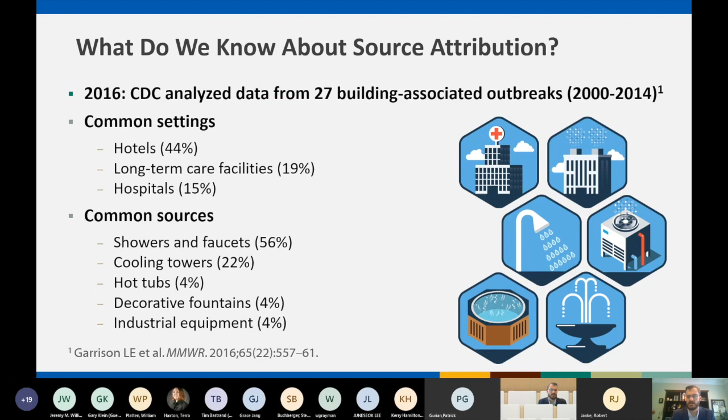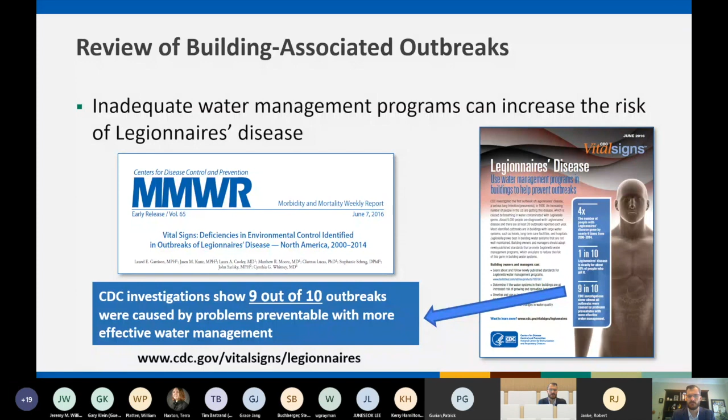So looking a little deeper into that analysis, in the form of an MMWR which you see here on the screen, the big take-home point from that analysis was 9 out of 10 outbreaks were caused by problems preventable with more effective water management. What we're seeing oftentimes is simple associated failures during these outbreaks.

As we break them down, or look at the root cause of these outbreaks - the environmental deficiency or failure - we break them into process failures, like for example a management plan did not exist or an inadequate one was in place; human error, where a person did not perform something they were supposed to do, such as checking a thermostat on a water heater; equipment repair, so equipment malfunctions; or unmanaged external change, which could be something like an unmitigated water main break that resulted in brown water entering the building.

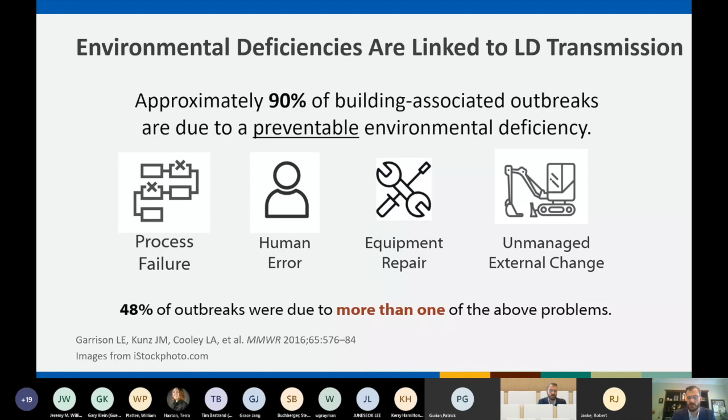48% of these outbreaks were due to more than one of the above failures.

Okay, so now we're transitioning into actual water management programs. So we quickly built the case for water management programs, and that they can be helpful and reduce those common root causes that we see during outbreak investigations.

So not all buildings require a water management program. Buildings that are recommended, of course, are healthcare facilities. Does your building primarily house people 65 years or older, like a retirement home or an assisted living facility? And this is a big one: does your building have a centralized hot water system, like a hotel or high rise? We know those water systems are more complicated, much more pipe, much higher likelihood or density of biofilm.

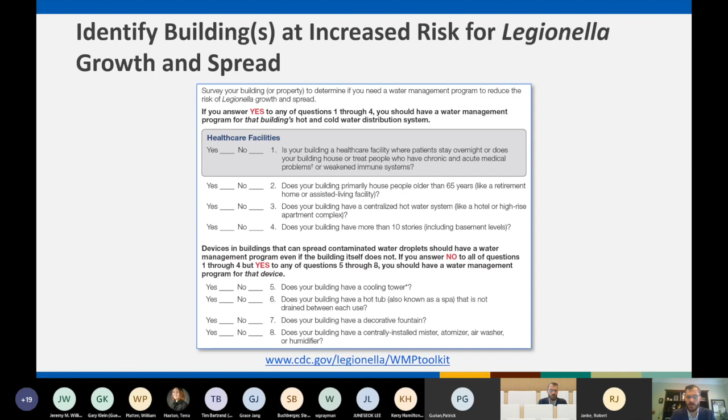Does your building have more than 10 stories? We get questions about that a lot, but the reality is oftentimes these 10-story buildings have these centralized water systems. Or does your building have a device such as a cooling tower, a spa, or even a decorative fountain, or a centrally installed mister, such as those grocery store misters in the produce section? Those devices are recommended to have a water management program.

You may have heard of the CDC Water Management Program Toolkit, or the CDC Legionella Toolkit, there's a picture of it on your screen. That toolkit is actually a plain language version. We translate the bedrock standard of water management, which is ASHRAE 188, into plain language to make it easier to digest for public health professionals, building managers, healthcare facilities, engineers, anybody responsible for implementing water management programs. It's a step-by-step program which goes through all the aspects of water management and provides helpful examples, including a healthcare specific section. That's freely available online right there at the link.

We also understand that water management can be complex, especially in these large buildings, and oftentimes building owners and managers just need to know where to start. So we developed this training along with partners called Prevent LD, and it's a free training available at the link you see below. It takes that CDC toolkit and ASHRAE 188 and puts it into a couple-hour training program, and it is free and available online. I would like to point out some of the templates, and you can see just a brief screenshot of the template on the screen there.

These are actually tools and templates that could form a water management program. It concludes with 2 case studies, one of them in a non-traditional setting, an industrial setting, and the other one is in a long-term care facility. So I'd encourage you to take that if you want to learn more.

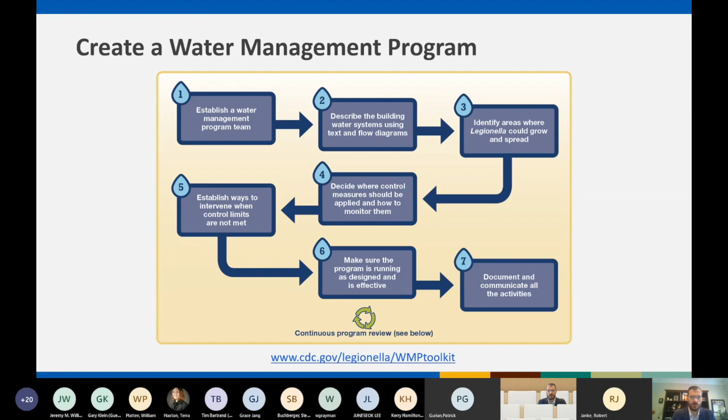So we'll go into detail on a few of them here. The most important is having a well-rounded water management team. That team may change based upon the facility size, complexity, and type, such as healthcare. So we'll go through a healthcare example.

We're going to need to have the ability to oversee the program, somebody in charge, somebody that can authorize expenditures or authorize things to be done, based on the water management program performance. We, of course, need knowledge of the water systems, and that's where facilities engineering and maintenance come into play. That also could be the role of a consultant on the water management program team. And consultants play a critical role, where needed.

However, a consultant should not be leading a water management program team. Those daily responsibilities should be given to staff on site. And of course, we need people that can implement that water management program and then communicate regularly about it. Oftentimes in healthcare, we will see someone like an infection preventionist sit in on that water management team as well.

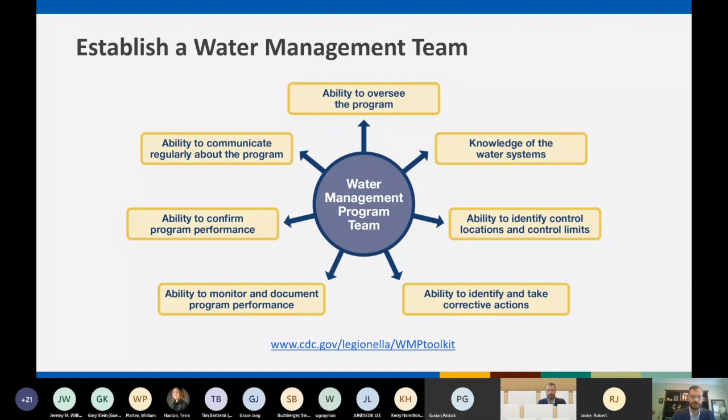Okay, so describe your building water system. This is where we start to get into some of the engineering aspects. ASHRAE 188 and the toolkit call for first a simple text description of the water system.

The water management plan should be able to be picked up by somebody who is not familiar with the building but has a general understanding of how it's set up. Then we move into simple diagrams of the building water system, and this is critical.

What you see is a simplified diagram, probably of a hotel, since it includes a pool and hot tub. We go through receiving, to cold water distribution, to heating, to hot water distribution. Those two together allow someone to quickly understand the water system. If you can't understand your water system, it's really difficult to implement a water management program.

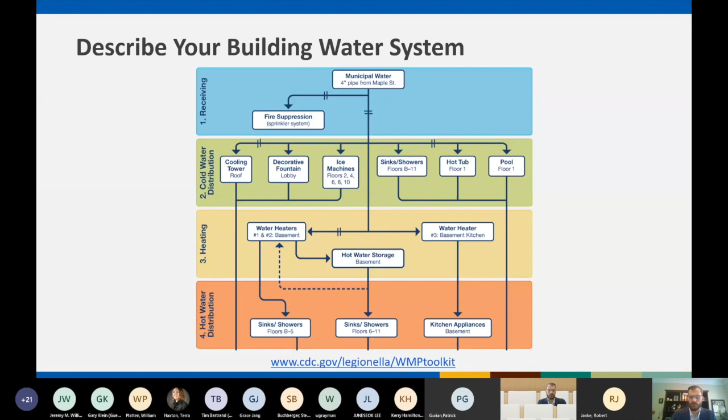Now that we understand our water system, we can perform the hazard analysis I described earlier—trying to understand where Legionella may grow and potentially spread within the building water system. This is unique to every building. For example, water heater temperatures may be different in this hotel due to equipment limitations, so the hot water may be at more risk here than in another building.

We also have a pool and a hot tub in this building, and of course a decorative fountain and a cooling tower.

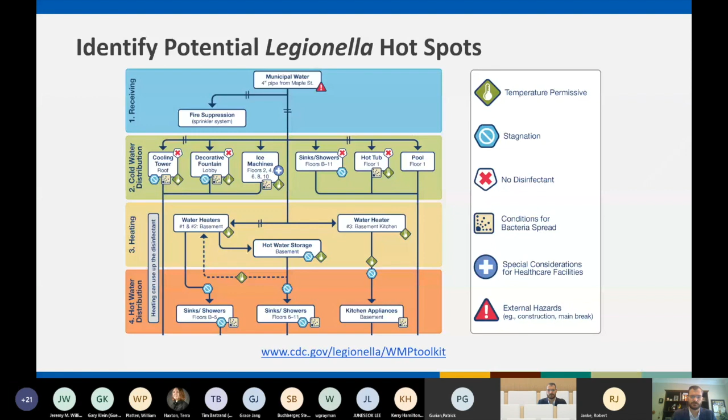Then here, control measures and corrective actions. This is the process where water management catches the environmental deficiencies we find during outbreak investigations. Let's use a hot tub as an example: we've identified a hot tub, and our control measure is disinfectant within that hot tub, among other things, including cleaning and disinfecting.

That requires routine monitoring, and I'm responsible for going out four times a day to monitor the hot tub's disinfectant levels. If the disinfectant level is within control limits, I mark yes, record those results, and come back and do it again later.

A bather load issue could be something more complicated, such as a chlorinator that tripped or is broken. Then we perform the corrective action, document the results, and if it's within limits, yes, we continue on the old path. If not, we keep working on it and may move to enhanced monitoring. That's the basics of control measures and corrective actions.

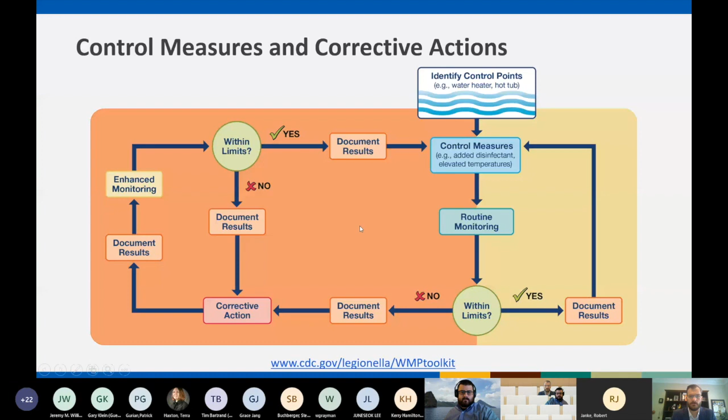Now we're sliding into the end of water management: the two V's, verification and validation. Verification is, are we doing what we said we should do—meaning, am I checking those disinfectant levels in the hot tub like I'm supposed to? I should not be verifying that myself; someone else should be verifying that I'm doing those disinfectant checks.

Validation is, is our program actually working to control Legionella? That's where we review our data to indicate the maintenance and operation procedure in place is working for the hot tub—we're not routinely out of control limits. That's also where Legionella sampling comes into play, which is an option to validate a water management program.

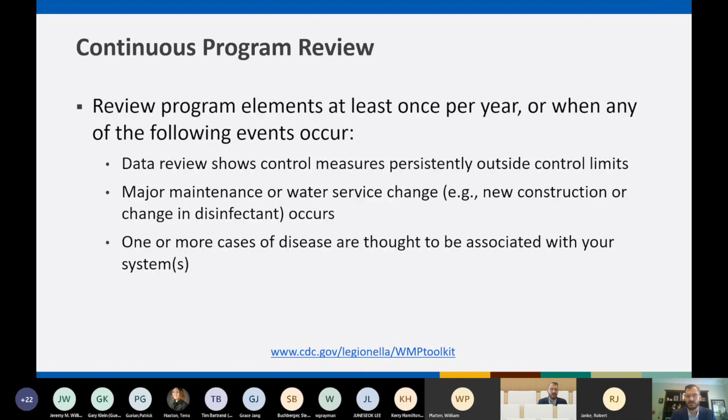In a healthcare setting, routine surveillance can also be used to validate the program. Last is continuous program review. As I indicated, it's an iterative, continuous process, and we should update the water management plan based on data showing control limits are consistently outside range, or when we do major maintenance or engineering changes within the building, or if cases are associated with the system.

And that concludes my presentation.

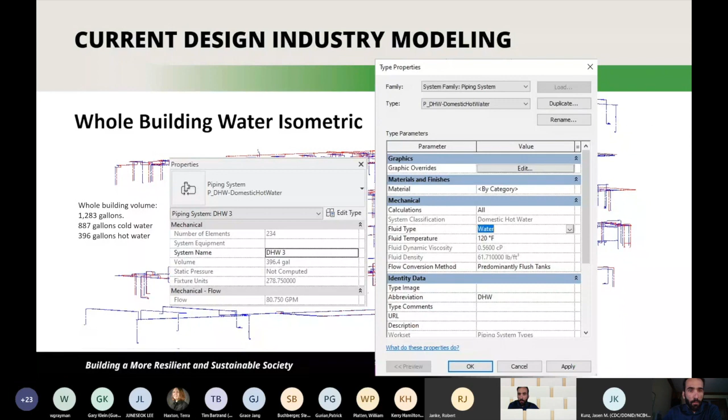So we get into the current design industry. On the right here is a snapshot of what Revit has as far as inputs and calculations on a domestic hot water system, being water at 120 degrees Fahrenheit, with the conversion flow method predominantly flush tanks. On the left, we have output information for a domestic hot water system. This is where we find the volume of the system as a whole is 396 gallons, total fixture units 279, with a flow of about 81 GPM.

This is meant to illustrate the web of water piping within a commercial building. It's busy, but we'll drill down to clarify some of what you're seeing. We build the building virtually. The architect does it, builds the building itself, and we fill it with all the engineering, piping, ductwork, electrical. That's what we do as an industry.

Getting down into just the plumbing side of things, this is a hot and cold water piping system of a 4-story building, a healthcare application. It has a basement and a penthouse, so you can see floors 1, 2, 3, 4. The whole building volume is about 1,283 gallons, 887 gallons of cold water, 396 gallons of hot water.

As we drill down a little more and talk about flushing a water system out, we know that the water main, from the street to the building, has 222 gallons. This requires flushing a drain valve 25 minutes at approximately 10 GPM to bring fresh water to that drain valve location.

From there, we want to flush out the common cold water riser, coming into the building and going up to this hose bib up here. So the common water riser, 60 gallons, requires flushing a hose bib 12 minutes at approximately 5 GPM.

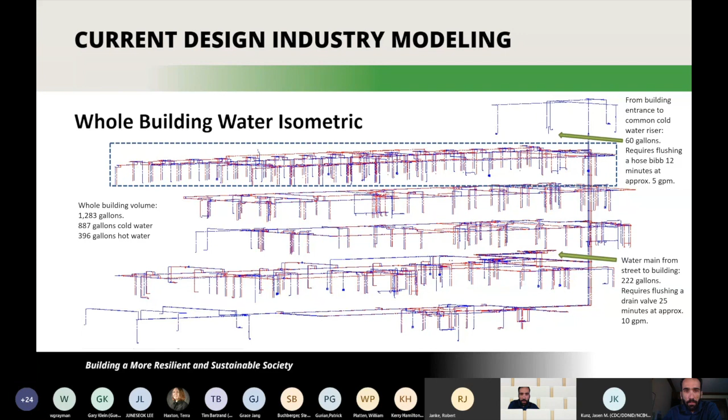Now we're going to focus a little bit on this 4th floor to get a little better clarity of what's going on. This is a patient wing water isometric, a total of 20 patient rooms with all the ancillary common area fixtures. The patient wing volume is 220 gallons, with 150 gallons of that being cold water, 70 gallons hot water.

Since we already flushed the cold, we want to look at this floor to flush the hot water common riser. So 27 gallons requires flushing a faucet 20 minutes at approximately 1.5 gallons per minute.

From there, we flush the wing itself, so the mains in the wing. The source is coming in over here. This is the most remote cold water fixture, the most remote hot water fixture. So approximately 100 gallons of cold and 55 gallons of hot requires flushing a faucet 70 minutes for cold and 40 minutes for hot at 1.5 GPM. As you can see, it can be a little time consuming when you're restricted to 1.5 GPM.

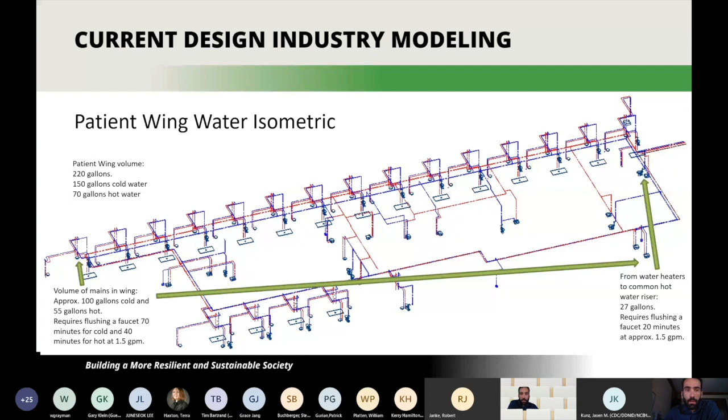From there, we drill down to just the patient room isometric. This gets a little less volume, so 2.3 gallons on the cold, 0.7 gallons on the hot. We've got two faucets at 1.5 GPM each, requiring 15 seconds of runtime each to flush out part of the main and the individual branch going to the fixtures. One shower at 2.5 GPM is 10 seconds of runtime just to clear the branches to the fixture itself. And the water closet, one flush cycle clears out most of the rest of the main in this application.

Other fixtures will vary depending on distance away from the flush main, so that's just a case by case basis. It's usually easier to figure out because you have one fixture coming off a main.

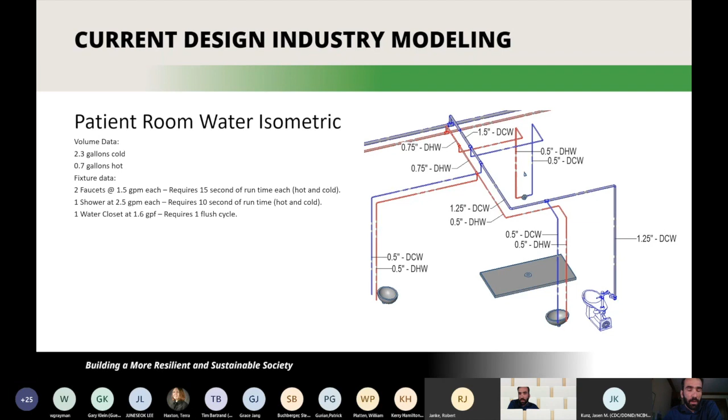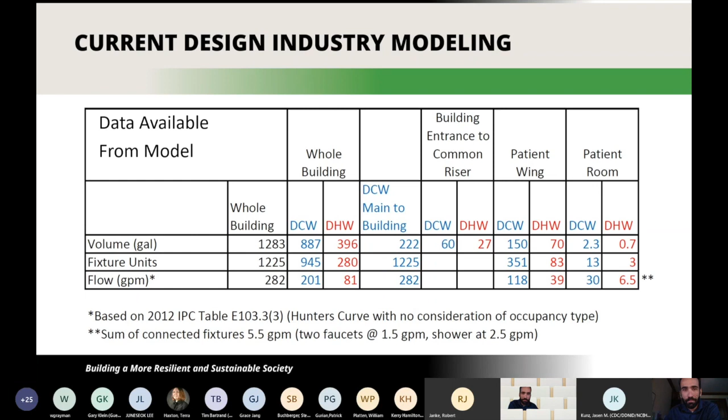So we'll talk about the sizing impacts of industry standards—right size versus industry size. I use the quotes because neither is clearly defined and needs engineering judgment to implement.

When I talk about right sized, this is based on historical data collected via flow meter. Realistic diversities are taken on the flows using that information from the flow meter we've collected. We get the actual flows closer to 8 feet per second on the cold water side and 5 feet per second on the hot water side. This does run the risk of undersizing and higher pressure loss. One of the anecdotes of the industry is no one complains about having too much hot water or too much water pressure. They always complain about the inverse of that.

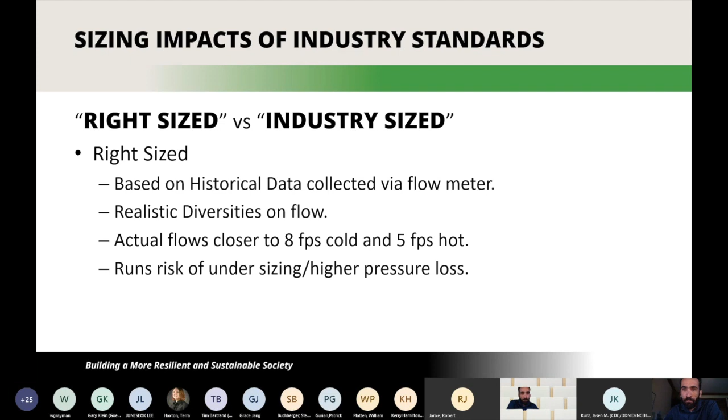When we talk about industry size, it's based on Hunter's curve. This might consider diversities based on occupancy. The more experience you get, the more you realize that Hunter's curve is grossly oversized, but we don't know where to take it to right size stuff.

So unrealistic flows used in sizing—actual flows are far less than 8 feet per second on the cold and 5 feet per second on the hot. Actual numbers suggest reality at peak is less than 1 foot per second in large pipe. So the industry would always go with too large because you can always add to it, but we're realizing now that that's a negative impact on the building age of water.

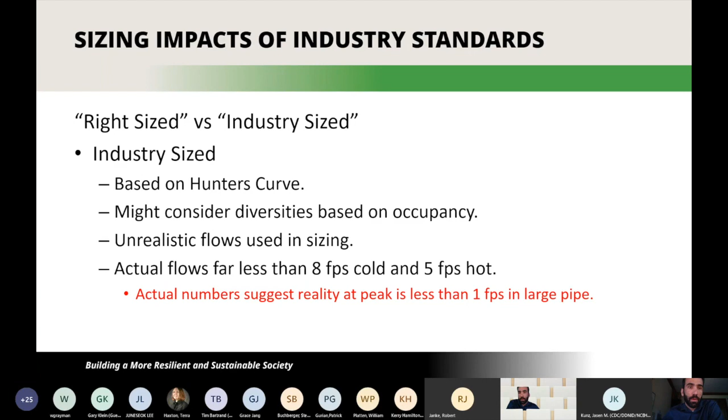So I went on to apply industry standard sizings with no regard to realistic data to the model that I showed you. We ended up with approximately a 30% increase in volume of water, more water to become stagnant inside pipes, lower velocities. The big changes were a 3-inch water main from the street becomes a 4-inch. Most of the route increased by 1 pipe size. Individual fixtures or groups of fixtures are not impacted, as they're already sized appropriately because there's no diversity you can take on those—if a fixture's on, it's on.

The other interesting piece of information we found was there's about a 40% increase in materials by weight. In this instance, we're using copper piping, so 40% more copper piping is required if we were to use the industry standard sizing versus taking the liberties on the right sizing side of things. So this is cost impacts to the project and environmental impacts when considering manufacturing energy. It's the whole carbon footprint, not just what you're paying for on the job site, that needs to be considered.

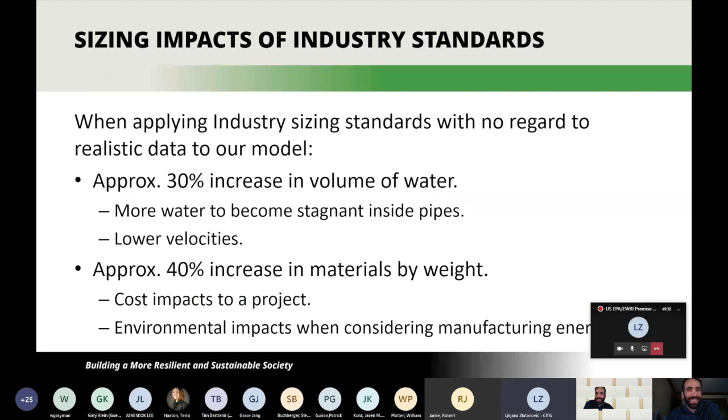All right, so I think I left off here—the problems of the sizing impacts in industry standards. So water quality issues: low residual for disinfectant due to age of water in the system, increased biofilm which harbors the bacteria, loss of temperature for hot water systems. The more water you have in the system, the lower the flow is, the more we're just losing to what we call the heat sink of the building. So you're losing that energy in the hot water system because it's not flowing fast enough to get to fixtures.

Increased volume of flushing to get the hot water to the tap. So if you want to take a nice hot shower, you're going to let it run until you get the hot water to you. So the sooner we can get that to you, the less water is wasted there.

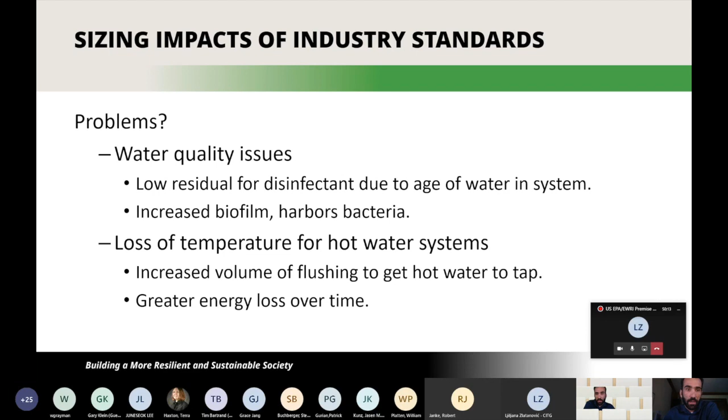Going into meter data, this is just a sample of data that we use in right sizing. This graph is a 5-minute average of a lot of data points taken every 10 seconds over the course of one day. In this instance, the system is sized for 150 GPM using industry standard sizing, which resulted in a 4-inch hot water pipe. 150 GPM is 4 feet per second in that 4-inch pipe, staying within industry guidelines of not going over 5 feet per second on a hot water system.

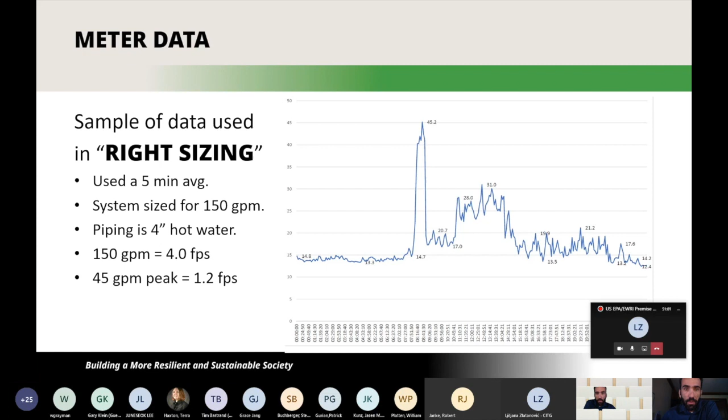What reality shows is 45 GPM peak in that same 4-inch pipe is 1.2 feet per second, and that's only for this one spike. When you get to these areas down here, it's well below 1 foot per second.

So this is a lot of information, but it tells us the time and range at the various GPMs. One thing to point out is 99.9% of flow happens below 50 GPM, that's the highlighted areas here. 50% of the flow happens below 15 GPM. So if we're sizing our system for 150 and we're flowing 15 GPM all the time, that's even less flow, under normal circumstances, half the time.

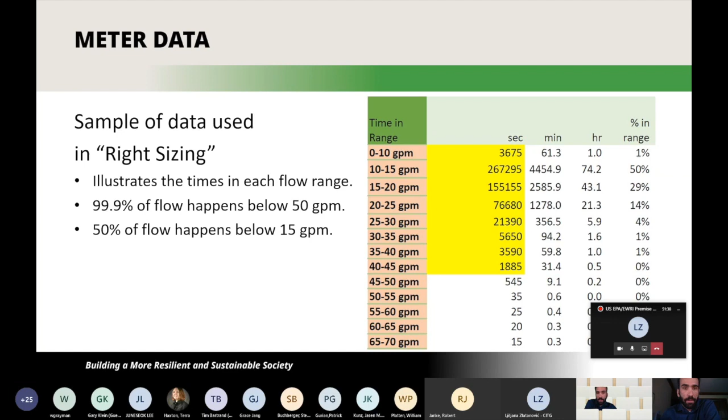Going into future studies, age of water studies is going to be big. It's harder to determine age of water, so we try to reduce the amount of water we have in a system - the more it's used, the younger it is, if you will. So how long does water sit before becoming non-potable? This guides non-potable water dumping to maintain chlorine residual.

We need to determine true usage, the p-values in commercial building fixtures. That'll help us determine if this bank of 20 fixtures is only going to have 2 fixtures running at any one point in time, we size that main for just those 2 fixtures.

Increased data on building water flow metering would be helpful as well. The more information we can get on that, the better we can dial in the Hunter's curve to right size building systems. An interesting study would be comparing temperature loss related to increased pump energy - you have more temperature loss with larger pipe, more pump energy with smaller pipe. So where's the trade-off?

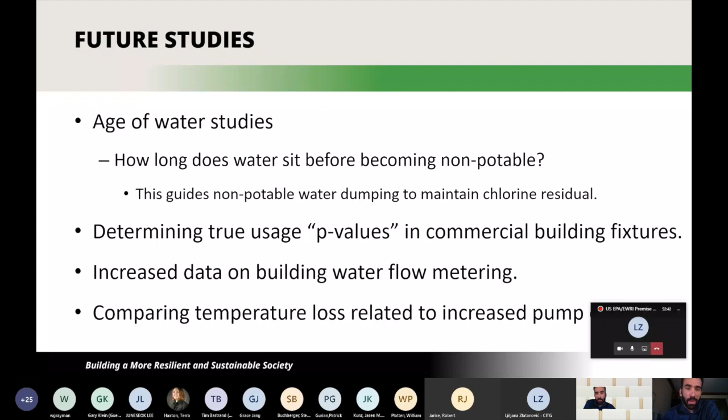And that's all I have. Thank you guys for your time.

Sure, great. So first of all, big thank you to Raj Singh, who's research faculty and drafted this presentation for me. There are many, many collaborators on this, and this will be like a quick overview of the research project, kind of snapshots of different papers, and different authors are associated with different papers, so I didn't try to put them all on the title slide.

So here's what I wanted to talk about this morning. First, the question of how should we be managing water quality in buildings - try to synthesize knowledge from experts and guidance documents. Then look a little bit at how we are managing water quality in buildings, a survey that we're doing of superintendents and facility managers, and then think about how we could bring these two closer together by providing decision support. Again, really brief tour - there will be links to papers. In some cases I'm just trying to pique your interest in a paper, and I'll have a link to our ResearchGate site that has our papers listed as well.

All right, so the first one, I'll talk about this in a little bit of depth. This is basically looking at controlling opportunistic premise plumbing pathogens, or OPPPs, and looking at a systematic review of guidance documents and conversations with some subject matter experts - looking at what do we know, what do we not know, what do we agree on, what do we disagree on.

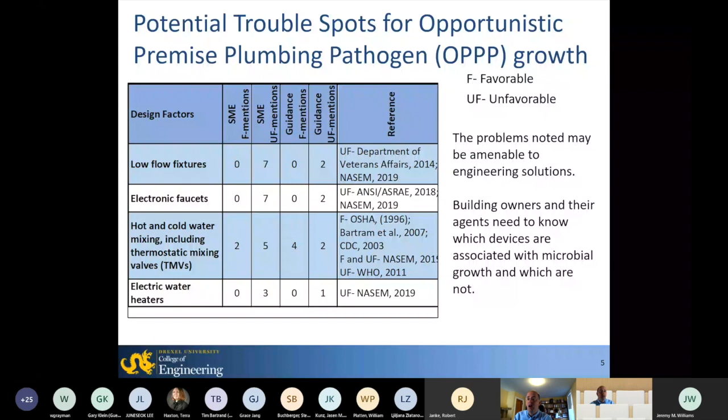When we got to thermostatic mixing valves, it was kind of a mixed bag. People had favorable and unfavorable things to say about them. If you talk to the experts, it would just slightly shade towards the unfavorable. If you read through the guidance documents, maybe slightly shade towards the favorable. I think that continues to be a difficult issue for us to sort out—there are contexts where I think they can work, and contexts where they're maybe not being well maintained and might be doing more harm than good.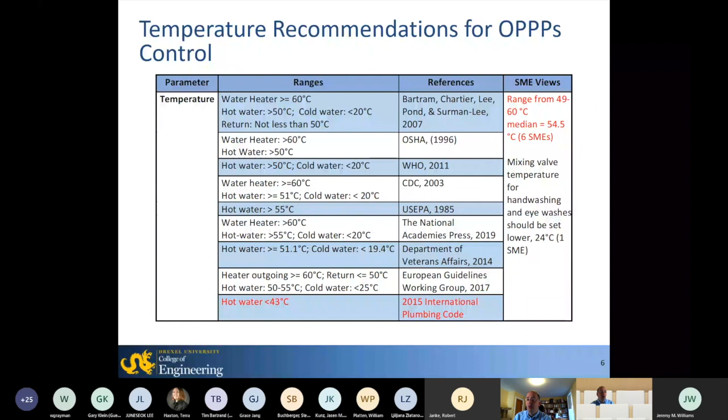Meanwhile, if you look at the concern over scalding, it's below 43 degrees—at that point you can have almost unlimited exposure to the water. Other guidance says keep it at least below 49 in terms of scalding risk; you can still get scalded at that temperature, but the exposure periods are quite long. So there's a little bit of daylight between the guidance for opportunistic plumbing pathogen control, and certainly the well-acknowledged conflict between scald control and OPPP control.

Rashed, who's my graduate student, went and tried to do a meta-analysis of this. He looked at reports from hotels on temperature in the hot water system and the probability of Legionella being detected. Unfortunately, you can see that even at fairly high temperatures, the probability of positive results was reasonably high.

That would be sort of a push towards the higher temperatures, but we have to keep in mind that it's not just about detectable versus non-detectable—risk is going to be a function of concentration, we're pretty sure. It might be interesting to see how much this curve would change if, instead of just detectable, we looked at the probability of being above, say, 1,000 CFU per liter—some sort of concentration threshold.

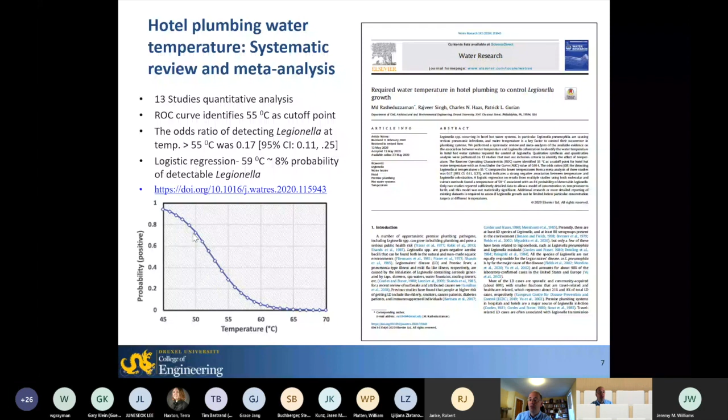There was some suggestion in the data that indeed higher temperatures would be much more effective at controlling levels below, say, 1,000 CFU per liter. But unfortunately, there wasn't enough data to really analyze quantitatively and fit a nice logistic regression curve like Rashed could do to the detect and non-detect data.

This brings up the question of how much Legionella is too much—is any detectable Legionella too much? This is something that Kerry Hamilton, who I think has spoken to this group, addressed in a paper in Environmental Science and Technology. The answer, of course, is it depends. There's not really a bright line approach, but just to pique people's interest a little bit, I'm going to try to throw out a bright line value, if you will.

It depends on the dose response function that you use. But if you're looking at that 1 in 10,000 risk value that has sometimes been used as a benchmark, you could do the math and map that to 1,400 CFU per liter. But again, lots of assumptions and uncertainty in that, so certainly not proposing that be adopted unthoughtfully.

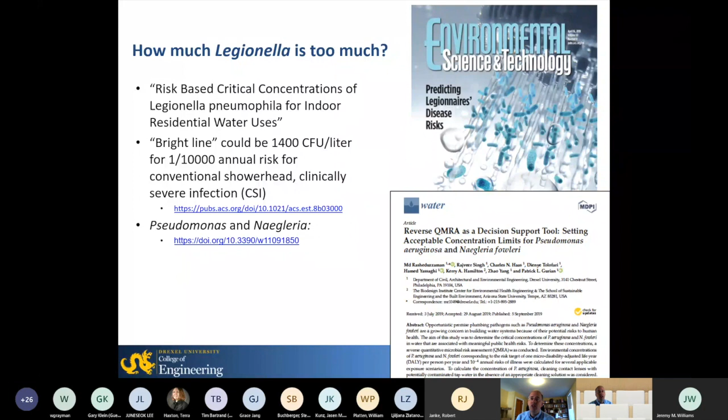Then Rashed did sort of the same thing with Pseudomonas and Naegleria. There hadn't been too much quantitative microbial risk assessment based guidance in terms of what's a problem versus what's not. So now we've got 3 of these organisms where there's some QMRA guidance as far as how much is too much.

Next thing is to flip over from the guidance side to the descriptive side. What are people actually doing?

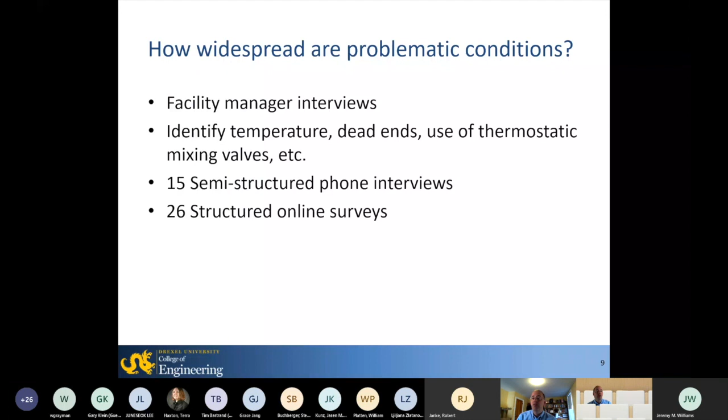We interviewed 15 facility managers, and then to speed up the process, we were able to do it much more efficiently through a structured online survey. We got similar information via the two methods of collection, so we did pool that here. I'm just going to give a quick overview.

The interview responses, the medians, are shown on the left-hand side, and the guidance that we were pulling from the literature is shown in the next column over. Everything that is yellow is something that looked like a conflict between what we were seeing in the guidance documents and what we were hearing from our interview and survey respondents. For example, the median set point that they reported for hot water heaters was 130 degrees Fahrenheit, versus what we were seeing in some of these guidance documents, which was greater than 140 degrees.

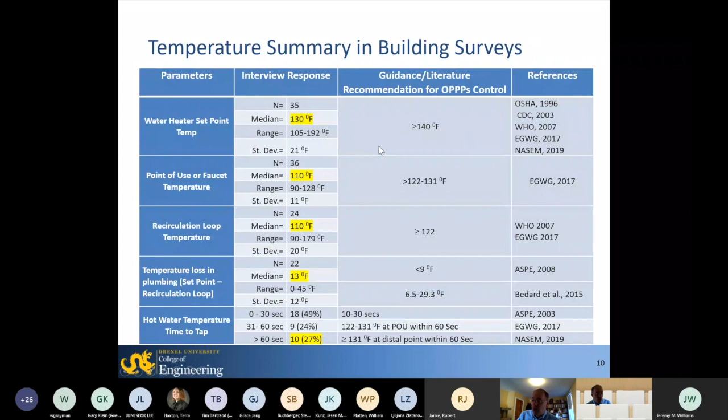I'm going to jump over to the laboratory side of things. This is Dienye's paper, another grad student I'm working with. This was a full factorial study of a cold water system looking at different pipe materials—CPVC, PEX, and copper—two diameters, 3/4 inch and 1/2 inch, and two stagnation times,

12 hours and 1 week. There was a system set up here in Philadelphia that had chloramine as a disinfectant, and a system set up in Boulder that had free chlorine as a disinfectant. We don't have a perfect experimental design as far as varying the disinfectant—it just wasn't feasible to dechlorinate and then rechlorinate with the other disinfectants. So we did the best we could: we went to two different cities that used different disinfectants. So there is some confounding with potentially unobserved factors there.

But in the chloramine system, here in Philly, we did see that with the smaller pipe diameter, you really did lose residual faster, whereas with the free chlorine system, we didn't see much of an effect of pipe diameter on losing residual. The possible story behind that would be that biofilm growth is maybe more important in terms of chloramine residual loss. Maybe bulk water decay is more important for chlorine, or is going fast enough anyway that we're losing it, and the interaction with the pipe isn't so important, whereas it seemed to be more important in the chloramine system. The smaller pipe you have, the higher surface area to volume ratio, so to the extent that this loss of residual is maybe being mediated by biological processes or other effects at the pipe wall, you do see more loss of residual in the smaller pipes in the chloramine system.

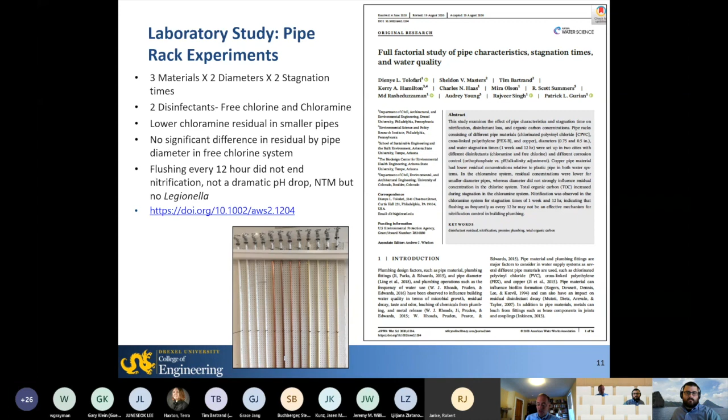They were actually more common in the system that was flushed more frequently. So we don't actually have a recipe for how to avoid any nitrification in a chloramine system. Unfortunately, we found at least traces of incomplete nitrification under pretty much all the conditions we looked at. That paper just came out, there's a link to it.

I wanted to, Patrick, go ahead. Sorry to interrupt, you have about 2 minutes left.

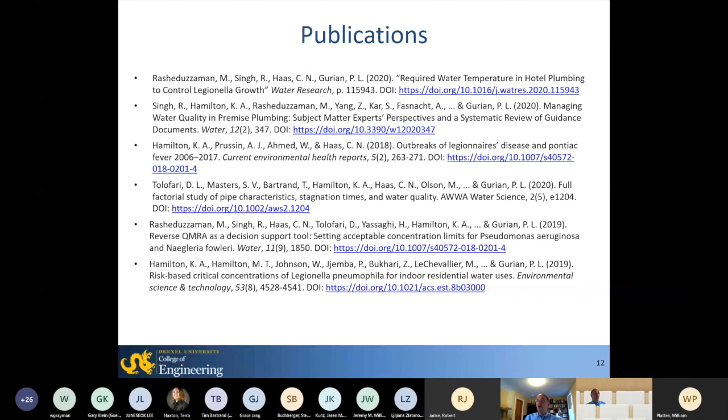Okay, great. So this is just the list of publications. I was hoping that maybe we'd be able to share the slides so people could access them if they're interested. And of course, there's a whole bunch of manuscripts in the file drawer that we hope to have out soon.

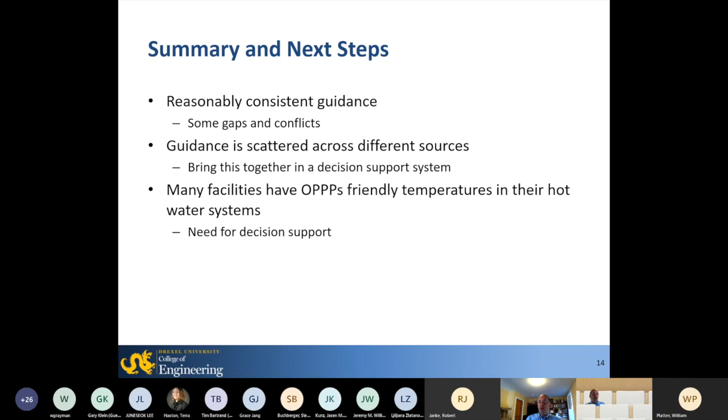Where do we go now? I think there's mostly consistent guidance. There are some gaps and conflicts, and some of the guidance, when you get down to the nitty-gritty level, is scattered a bit across different sources. So we're looking at how we can bring that together into a decision support system. It does seem like a lot of facilities have OPPP-friendly temperatures in their hot water systems, so there's a potential need for decision support.

There's some opportunities for people to be involved. We're always interested in people following us on ResearchGate. We are looking for participants. Our Delphi study is particularly looking for people who meet certain thresholds for expertise and would be willing to do several rounds, each round about 30 minutes. You're welcome to join for the first round and then ditch - you don't have to stay for all rounds of the Delphi study. So that would basically be a 30-minute survey, less than 30 minutes for people who meet the inclusion criteria in terms of publications and things like that. So please reach out to us if you have opinions about water quality in buildings and would like to weigh in on them.

And then in terms of the decision support, we're looking for beta testers. That is not so controlled of a process - we're just looking for input from anybody, so everybody is welcome to be a beta tester. We've got our contact information there if you'd like to volunteer for either of those opportunities. And then I just want to give our standard acknowledgement that we were funded by EPA, which we greatly appreciate, and name some of the many collaborators on these papers. So thanks so much for your attention.

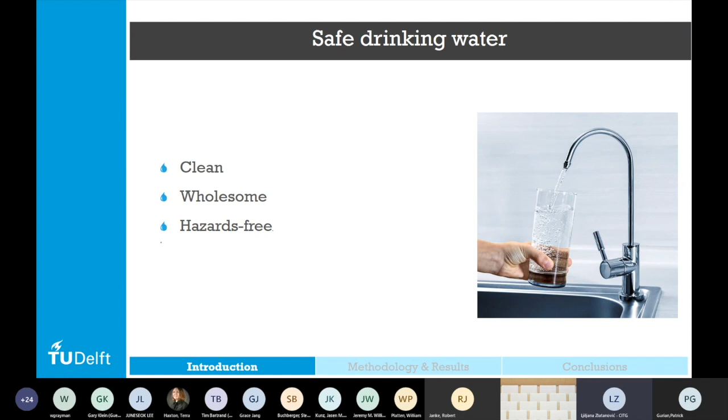There is no universal definition about safe drinking water, but what we all want when we turn on our tap is water that is clean, that contains no visible particles. What we would also like to get is wholesome water that is good for our health, and water that is hazard-free, that has no hazard that could potentially make us sick, either through chronic or acute exposure.

Because I did my PhD research in the Netherlands, I will just introduce you how the drinking water chain looks in the Netherlands. Actually, Dutch drinking water companies, there are 10 of them, they're publicly owned, and they are responsible for abstracting, treatment, and distribution of the drinking water. They have even their own secret how to do it, by applying, for instance, best available sources. On this screen, you can see that like 70% of the drinking water source is actually groundwater.

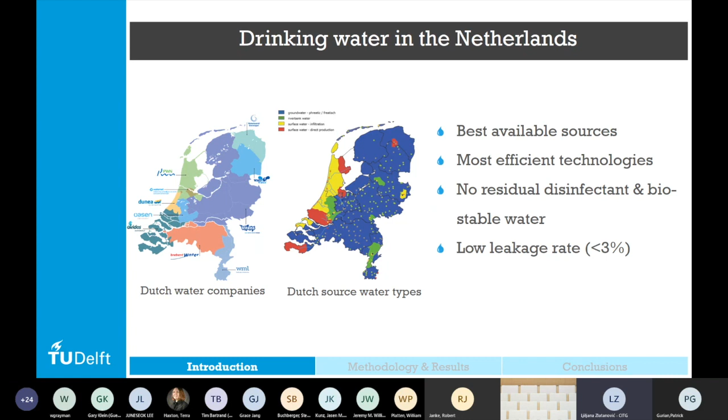We also apply very efficient technologies, either conventional or state-of-the-art advanced treatment technologies, to purify water up to the desired level. We distribute water without residual disinfectants - so no chloramine, no chlorine - but we do that by actually producing so-called biostable water. That is water that contains less than 10 micrograms of AOC, assimilable organic carbon, per liter. We also maintain low leakage rate, which is like less than 3%, and we optimize and maintain the distribution network, and we also apply statutory monitoring.

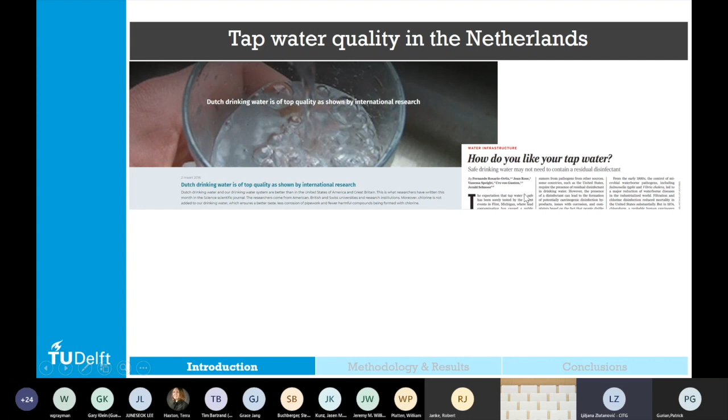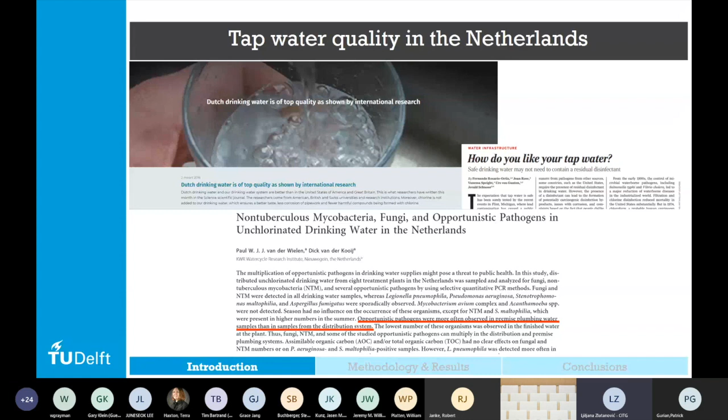Dutch drinking water is of top quality, and that is also shown by international research. Here's a nice article published in Science, How Do You Like Your Tap Water? But despite this, opportunistic pathogens are more often observed in premise plumbing water samples than in samples from the drinking water distribution network. So that actually points out how important premise plumbing is.

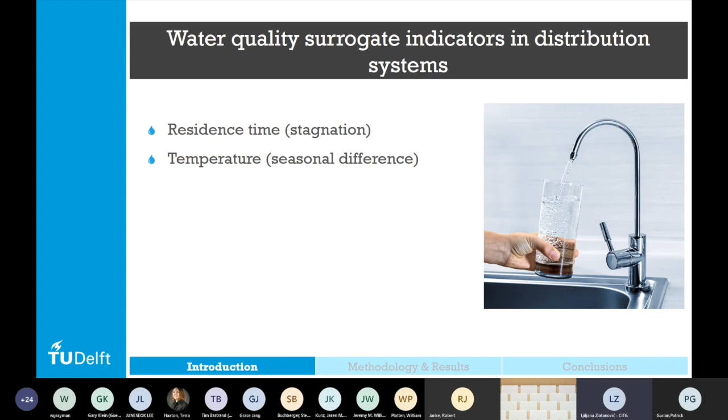By the time we started our research, there were already some studies showing that overnight stagnation could induce microbial activity in stagnant water. But at that time, it wasn't clear how temperature or the extent of residence time or stagnation actually impacts this. So our research goal was to assess the extent to which the two surrogate indicators for water quality, temperature and stagnation, contribute to the alteration of drinking water quality in premise plumbing.

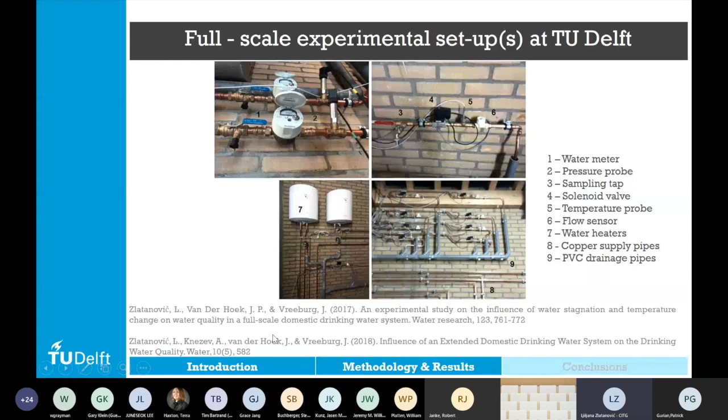To answer our research question, we had to build experimental setups. Here is a photo of how our experimental setup looked like. We built two premise plumbing systems. One was resembling premise plumbing in a typical Dutch house. The other was built with extra piping, for instance for fire sprinkler application. We published two papers, one in Water Research and one in Water, on the experimental findings.

So how we actually mimicked household water use: we generated 365 demand patterns. Each tap, we had 11 taps in our typical Dutch house plumbing system, so each tap had a unique water demand pattern every day throughout the experiment. We controlled and acquired data using LabVIEW software.

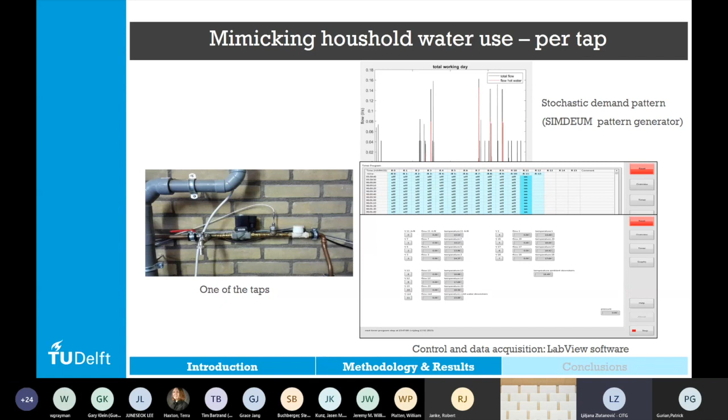We conducted long-term experiments, which meant that we sampled fresh water at 10 o'clock in the evening, let it stagnate for 10 hours, and at 8 o'clock in the morning we would sample stagnant water for kitchen and shower taps. We applied certain methodological measurements: HPC, heterotrophic plate count, ATP, adenosine triphosphate, flow cytometry cell count, copper, zinc, TOC, Legionella, and Aeromonas.

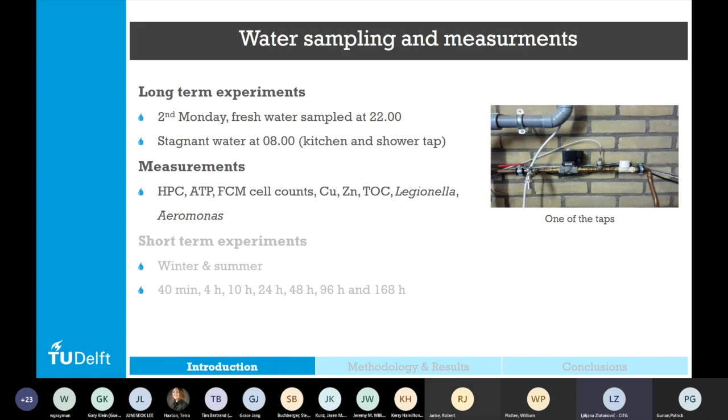We also performed some short-term experiments in winter and summer, where we left water to stagnate in our system for 40 minutes, 4 hours, up to 168 hours. At the end of our experimental run, we also extracted biofilms from kitchen and shower taps, but I'm not going to explain that further today. You can refer to our published papers.

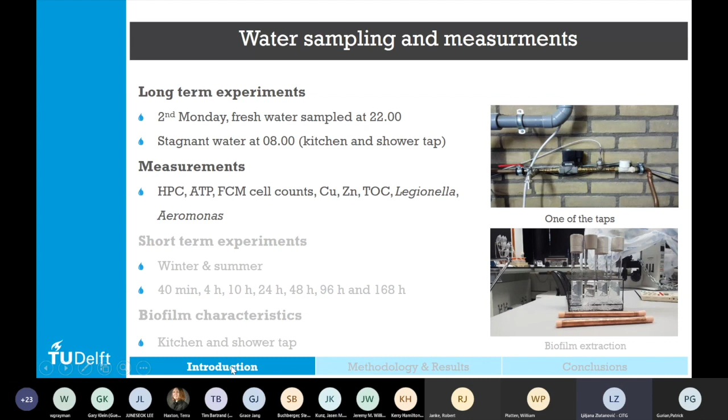As I mentioned, we measured copper leaching. We assessed copper leaching during overnight stagnation. We saw that there is a considerable amount of copper leaching from copper piping, and that was already known. But what was interesting was that there was quite a huge difference between stagnant water at the kitchen tap and stagnant water at the shower tap. That was also not known before our experiments. And the same goes for zinc leaching from brass elements.

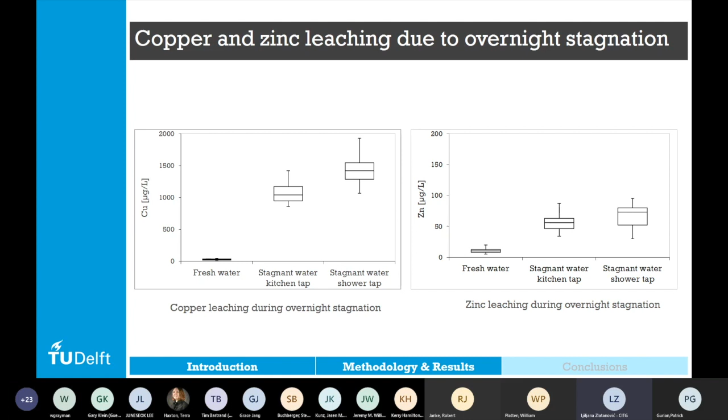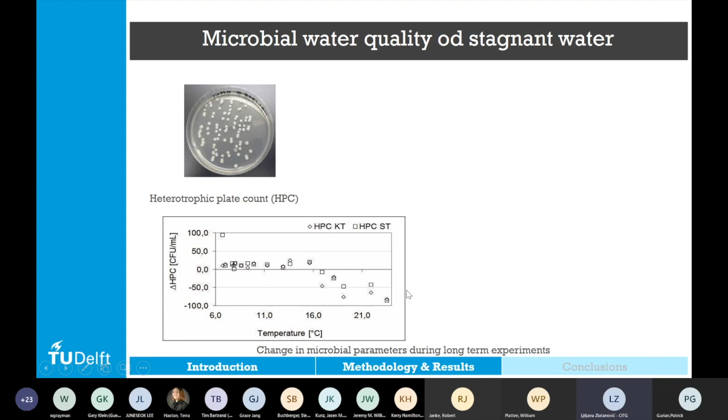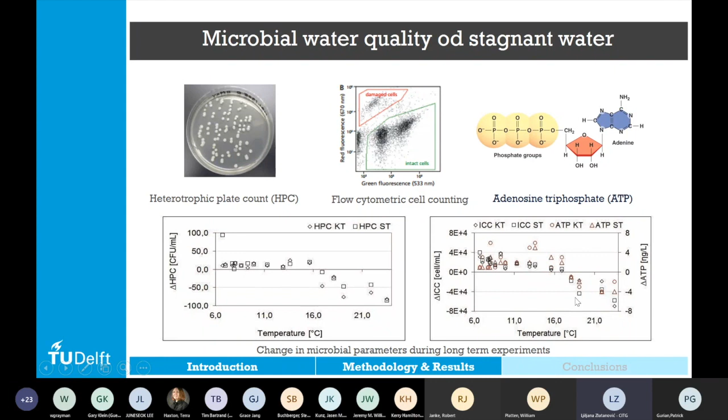We also assessed the microbial water quality of stagnant water using heterotrophic plate count, and it was interesting to see that there was a tipping point when looking into the change in microbial parameters for HPC, for instance. We see that if the temperature of water was less than 16 degrees, then we would have regrowth in our premise plumbing, and if the temperature was higher than 16 degrees, then we would have die-off of heterotrophic organisms. The same goes for flow cytometric cell counting, ICC stands for intact cell count, and we saw the same pattern, but the only difference was in terms of temperature. The tipping point here was around 17 degrees.

I will show you differences in ATP concentrations driven by fresh water temperature, which was 17 degrees, or in Fahrenheit around 63 Fahrenheit. So if fresh water was higher than 17 degrees, we would have a decrease in microbial activity, and vice versa. If fresh water temperature was lower during winter time, for instance, then we would have an increase in microbial activity. It was also interesting to see a difference between the kitchen tap and shower tap, probably because of the copper content I already mentioned, since copper is toxic to bacteria.

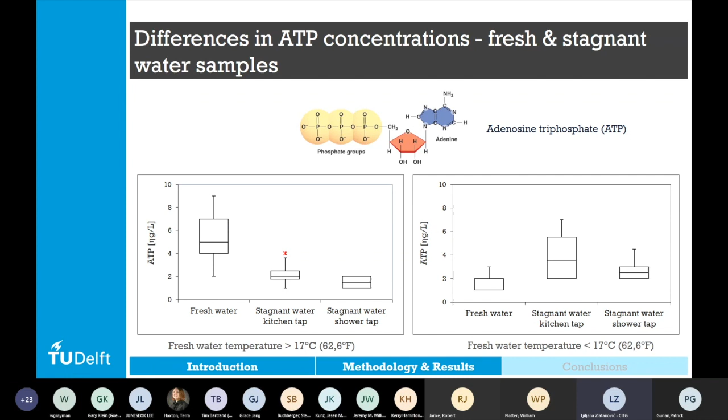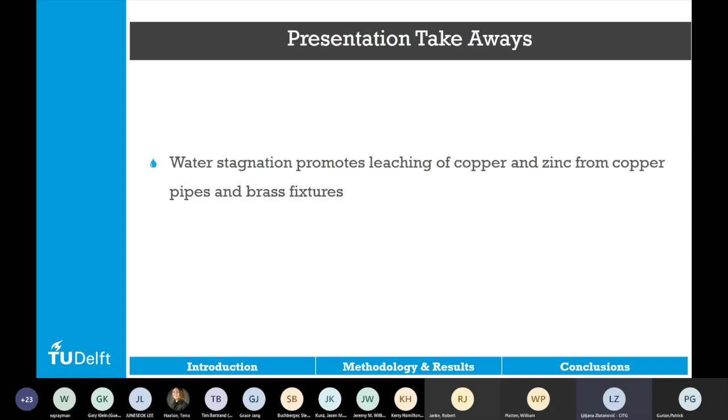So to round up, what were the presentation takeaways? Water stagnation promotes leaching of copper and zinc from copper pipes and brass fixtures, but we see differences between different pipes within the same household.

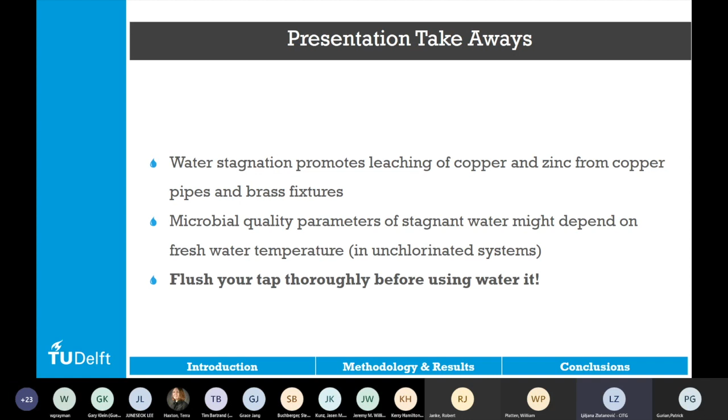Microbial quality parameters of stagnant water might depend on fresh water temperature in an unchlorinated system. Just to emphasize, there is no residual disinfectant in the Netherlands—no chloramine, no chlorine. So flush your tap thoroughly before using water, either for drinking or cooking.

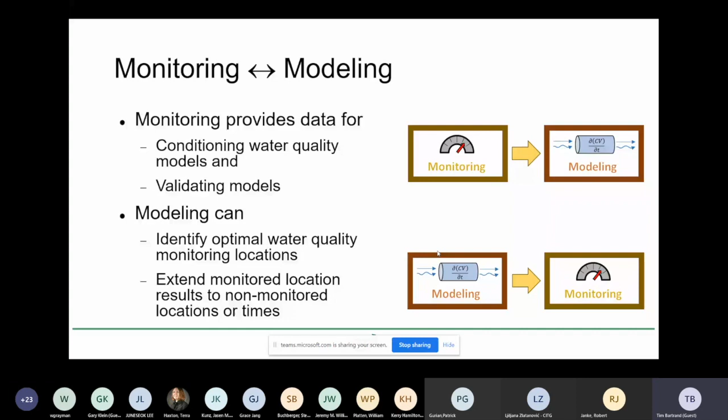Monitoring is a data source for conditioning, parameterizing, whatever you want to call it, the water quality models, and also for validating the models. Sometime down the road, we will be developing as a community the models, and we'll need to validate those using some data. In the other direction, modeling can identify optimal water quality monitoring locations. There are a lot of choices for where to monitor—you can't monitor everywhere—so having modeling assist us, in addition to expert elicitation, on where to monitor would be a great application. We can also extend the monitored location results to non-monitored locations or times.

The purposes I came up with for water quality monitoring are process control and operational monitoring. Jason did a very nice introduction to these, and I'll talk about them in a bit more detail. The purposes are to verify that the controls in the water management plan are in place and operating as intended, and then to validate that the controls are achieving their intended goal. Based on Jason's presentation, I'm going to modify my approach and talk not just about monitoring, but about surveillance, because public health surveillance, in addition to Legionella monitoring, really gives you the whole package of knowing whether your controls are adequate.

Event detection—it's almost a certainty that somebody on this call, or in the community, is thinking about event detection with respect to monitoring. There are efforts underway to do online or real-time monitoring in buildings, and why would you do that if you didn't have something to do with the data? That's probably going to be event detection. It could be detecting building water supply events, or detecting events within the building, like some bad effect of unexpected stagnation, as Patrick mentioned, or detecting the onset of nitrification. Those would be examples of event detection.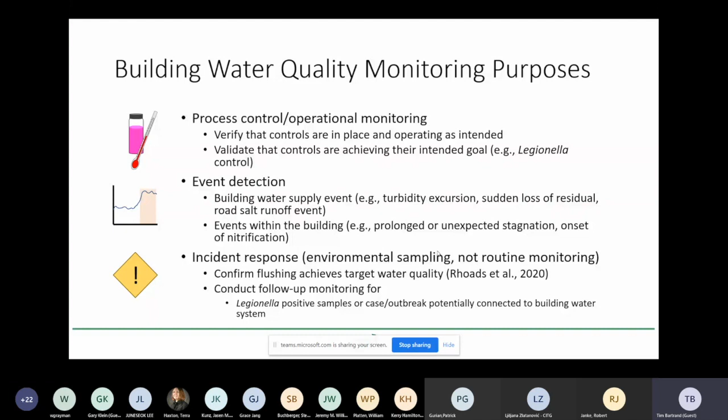So real quick, process control, operational monitoring. Why are we doing this? We're going to assess the performance of individual control measures and make sure they're working effectively and as designed. And we're going to validate the process controls are achieving their goal.

Key parameters: one is, this is sort of in the surveillance, not monitoring, area - system inspection and integrity, sanitary surveys, maintenance logs. Those are things that need to be monitored. Water use and water flow, temperature, disinfectant residual - those being the main tools in our arsenal, especially for Legionella.

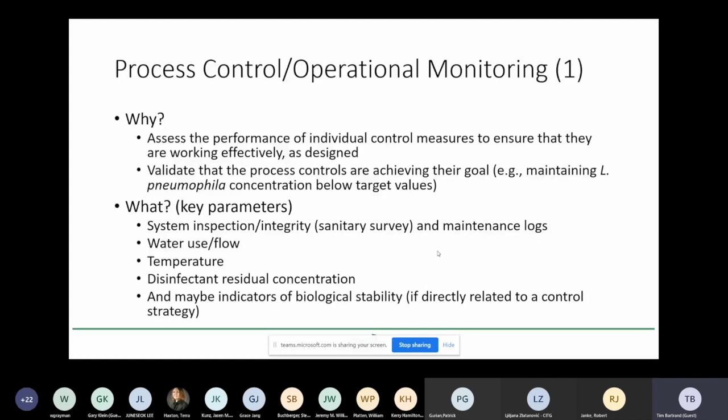And then other potentially indicators of biological stability. Ljiljana's presentation showed a really nice use of ATP and other measures of biological activity as nice indicators of water quality and water degradation in building water systems.

Where do you want to monitor? All of the control locations. So rewinding to Jasen's presentation, there are control locations that are chosen based on either the ability to control water quality or based on the likelihood that there is trouble, a chance that you might be growing, for example, Legionella in a location. You want to monitor at the building entry point and the water heater discharge and return, and in sentinel locations, distal locations.

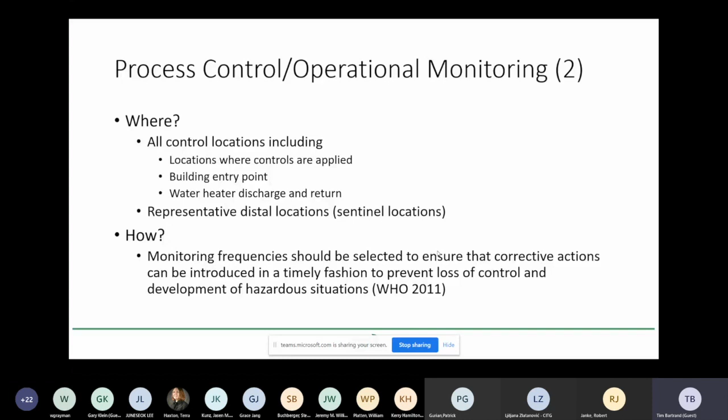And how are you going to monitor? This is more of an art than a science, but the WHO advises that monitoring frequencies are selected so that you can get your corrective actions in place in a timely fashion. And there's a lot of interpretation that can go into that.

Going on to validation and Legionella pneumophila detection and enumeration. I'm going to start the discussion about Legionella with discussing two methods, or two big picture approaches, for looking for Legionella. There are culture methods and molecular methods. And apologies to the microbiologists on the phone - this is a little bit basic for you, but I think helpful to go through.

Culture methods count the live, viable, and culturable organisms. So these are the organisms that we know, if somebody is exposed to them, it increases their risk of illness. The results of assays are directly indicative of health risks, and they can also be compared against standards and criteria that are culture-based. And to the best of my knowledge, all of the criteria right now for assessing water quality, for judging whether you are validly controlling Legionella, are culture-based standards. That doesn't mean that's going to be true forever. However, that's just the state of play right now.

To culture methods, there are molecular methods - this is the qPCR or other techniques that are used. And what they measure are concentrations of genetic material from live culturable, live non-culturable, and dead organisms. This is important because Legionella can become non-culturable, but that doesn't mean they're not a risk or a hazard. And I'll quote: if genetic material is found, it came from somewhere. And I say that because using results from molecular methods is a different way, and a valid way, to assess what's going on with respect to Legionella in a system.

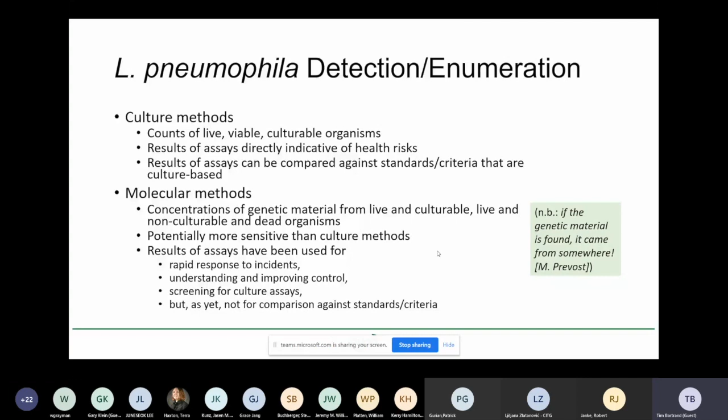There are some people who think that culture methods really have to be the technique that you use. And I've seen successful use of molecular methods for monitoring for Legionella. The molecular methods are potentially more sensitive than culture methods, depending on how you run the assay and the water quality. And the results of the assays have been used for many things, but as yet they can't be compared against standards and criteria, because those standards and criteria don't exist.

Where do you monitor for Legionella pneumophila? The CDC toolkit, which is a great resource we heard about earlier, says if the team decides to perform validation using environmental sampling for Legionella, first of all you have to have this as part of a comprehensive water management program. And sampling plans are unique to each facility. There's a nice quote, I think she originated it, Shantini Gamage from the VA: if you've seen one VA hospital, you've seen one VA hospital.

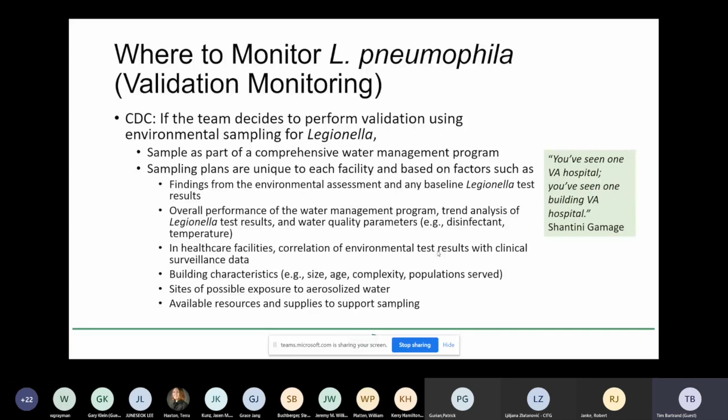Each building, as other speakers have said, is quite different from the others. So you have to tailor your monitoring, your Legionella monitoring, for the specific features of the building, and that includes the population served. And there are a number of other criteria that you might use that you can find in the CDC toolkit.

An example of a sampling plan - this is courtesy of my colleague Tom Hargy. Hopefully I've taken all the identifying features from this diagram. You can see that for a single floor of a healthcare facility, we have a number of sampling locations, and those were selected to include the point of entry, water heaters and hot water returns, and then locations either where there are critical exposures, or these sentinel locations, where we want to know, for example at the very end of the run, what the water quality is.

And I asked the community: could and should modeling reduce the reliance on expert judgment and help us develop better monitoring strategies?

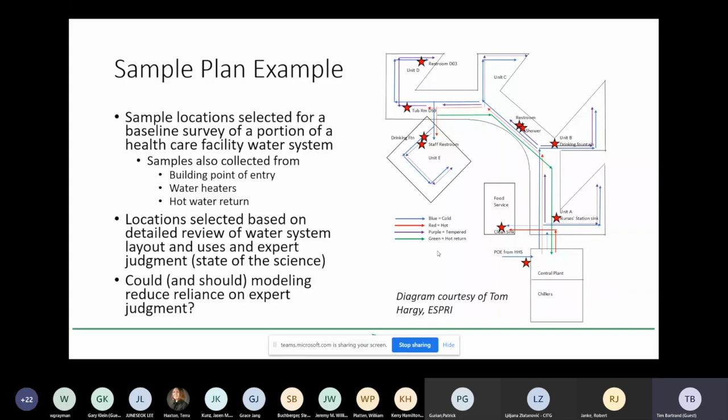I think that's a real good opportunity. A little bit more about Legionella pneumophila. You need a lot of data to make sense of Legionella counts. And again, CDC has given a pretty nice list of other descriptive data that you need to make sense from the Legionella, and you'll see in the next slide what those data look like.

Another thing about monitoring: before you start monitoring for Legionella or other opportunistic premise plumbing pathogens, you need a formal plan for what to do when, not if, there is a positive sample. You need to establish a priori trigger levels and actions and responses, and super critical, you need a communication strategy and communication tools. That is, the actual emails and texts and strategies like a chain of command. You have to have those in place before you start monitoring for Legionella, because it's incumbent on you to tell stakeholders what you find if you should find Legionella.